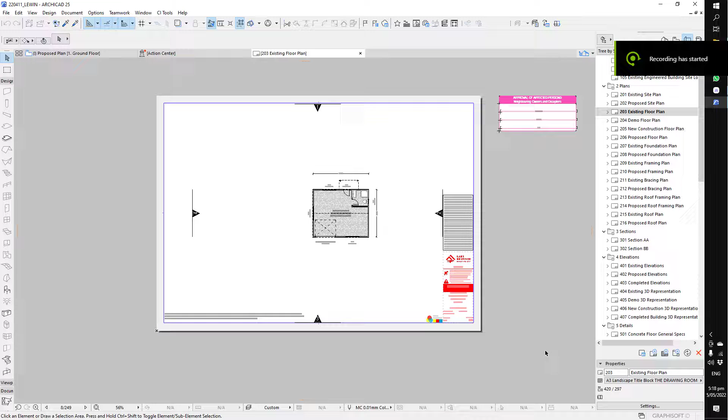I'll try and make it as fast and as easy as I can, then I'll give you a couple of options and you guys can make a decision and let me know what you want to do.

So first of all, importance levels. In the building code, there's a different range of importance levels, and that's your risk of failure during an earthquake, or an 'event' as they call it, 1 or 2.

Obviously, if there's an earthquake and it's a shed like a garage, the risk to human health and wellbeing is much reduced compared to a house, because there's people sleeping in the house. It could be 2 stories, you know.

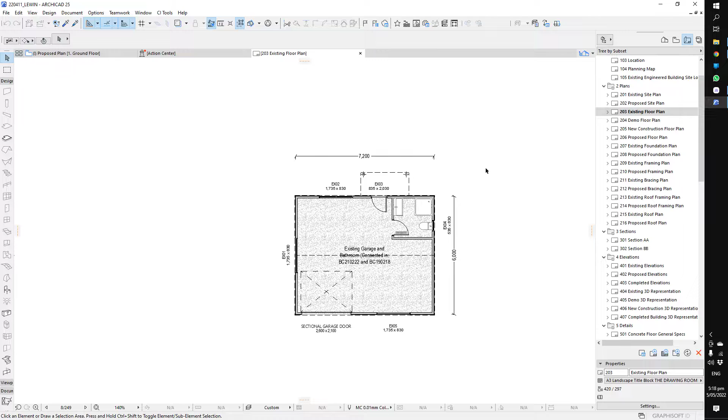So a house is importance level 2, and it has a higher level of risk mitigation, generally through bracing in your instance. Your shed currently, to be honest, has a level of bracing that far exceeds what a 1990s house has.

I would rather be in a shed in an earthquake, like a Christchurch earthquake, in a Skyline shed, than in a house from the 1990s. But the rules are the rules, right? So I'm going to take you through those now, and then you guys can make a decision about what you want to do.

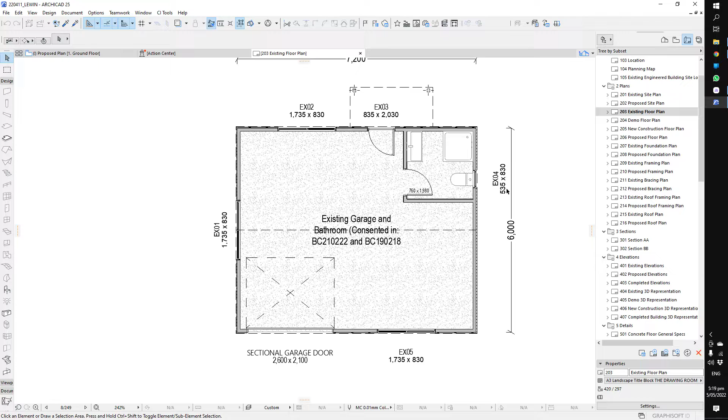The existing building, where are we? It's funny when you do a draft and then look back and see how many spelling mistakes there are. Quite frightening. That will all get tidied up. I do apologise.

Existing bracing. Alright, so on your existing plan I've laid out the bracing. The bracing can be a little bit more spread out in an importance level 1 building. It also doesn't need to be as high, and the way the bracing is transferred across one another doesn't have to be in the same plane.

So essentially, imagine a big wind came through here - actually, let's make it an earthquake. An earthquake comes through here. Now, it's never going to hit the same location at exactly the same time. So this strap brace here, which is a Sky 1800, and these two here - when that hits, the load is going to be transferred along in a shed, along the roofing line, and then down to these braces here.

So this wall's not just reliant on this brace, it's also using some of this wall's bracing when it hits. That's the basic principle - there's a lot more to it, but hopefully that gives you some understanding of what's going on there. Now, doing it through a roof is not a good way to do it - it doesn't connect the top plates very well, and it can cause the building to rack and twist.

But of course, in a shed, that's not really a big deal. In a shed, all we're trying to do is stop it from falling down and killing someone if they're in there - or actually, it says 'serious harm.' So the consequence of a failed shed is relatively low compared to a house, where you might have children sleeping in a bed or all sorts of things.

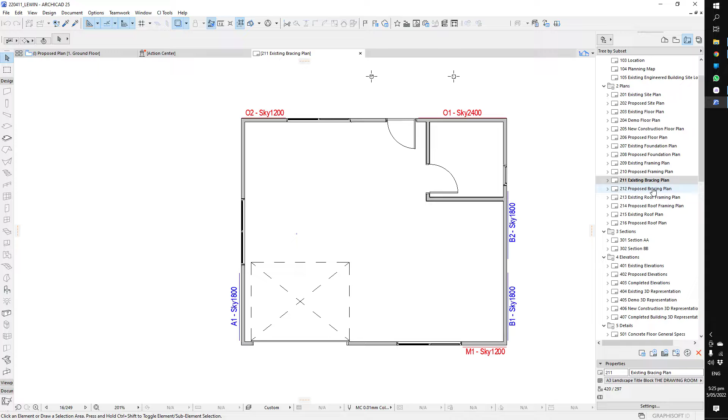But that would be a shed and a workshop, and then we could take that wall out. Obviously the final thing is to have this habitable and this not habitable, as we've proposed in the draft, but that means you need to keep this wall in here, because it's doing the bracing for this space, connected through the GIB ceiling that's through there, and this wall here is doing the bracing for this space.

So this is your importance level 1 bracing, and this is your importance level 2 bracing. Now, it's not actually quite as simple as I've suggested, but hopefully it gives you a good understanding of your options. So your options are: we turn the whole thing into a workshop, we turn the whole thing into a habitable space, or 3, we leave it as is. So those are your three options.

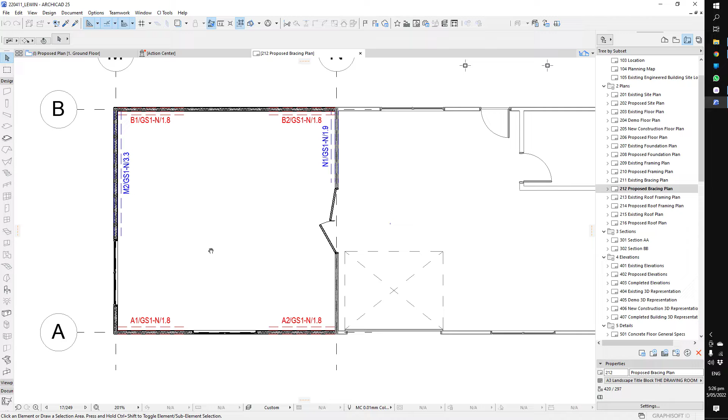And also I'd love to know a little bit about what you want to do for your glazing. We've obviously got the layout here. I just want to check that the glazing is all correct - no more spelling mistakes.

So we're taking that one there and shifting it over to there, and then we're putting a new window in there. So you're going to have to go through this garage to get into the sleep out. I honestly don't know what council are going to think of that. We have to have a fire egress.

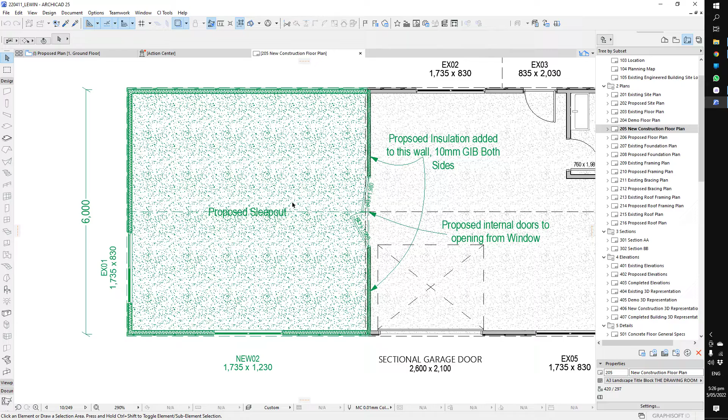I'm going to argue that there is fire egress through there, and also through your windows, but we'll just have to wait and see what council suggests there. It may be that they want a sliding door in there.

I also note that there's no kitchen on site and no dwelling on site. Some of the councils, not the West Coast councils, but they are changing - a lot of the councils define an ancillary building as being dependent on a major dwelling. So if you put a sleep out on, in most council areas you can't put a sleep out without having a main house, because they say a sleep out has to be dependent on a house, otherwise that's the house. West Coast to date have been really good about just not worrying about that and using some common sense.

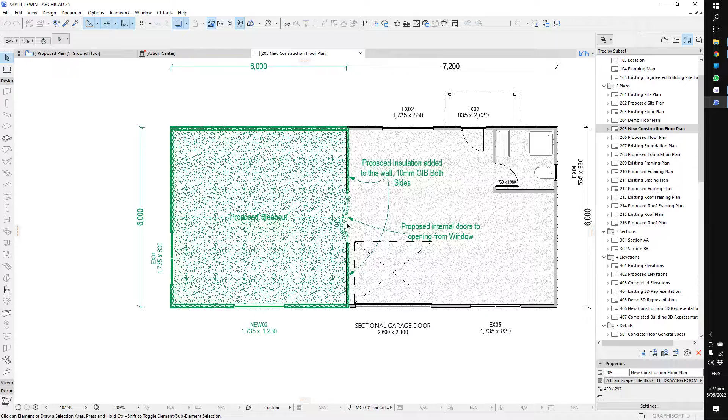But there is always the chance that we get one - I call them Hitlers, one little Hitler in there who decides he wants to enforce Auckland or Christchurch type rules on the West Coast, and we could always get them a little bit unglued with putting a sleep out onto a shed without having an actual dwelling for it to be associated with, because they're going to say, well, if you're going to be sleeping in there, you're also going to be cooking in there, and if you're going to be cooking in there, you're also going to be living in there. So that's a dwelling, and then, of course, you trigger even more regulations.

Awesome. All right, well, I hope that gives you a really good understanding. So if you could flick me an email back.